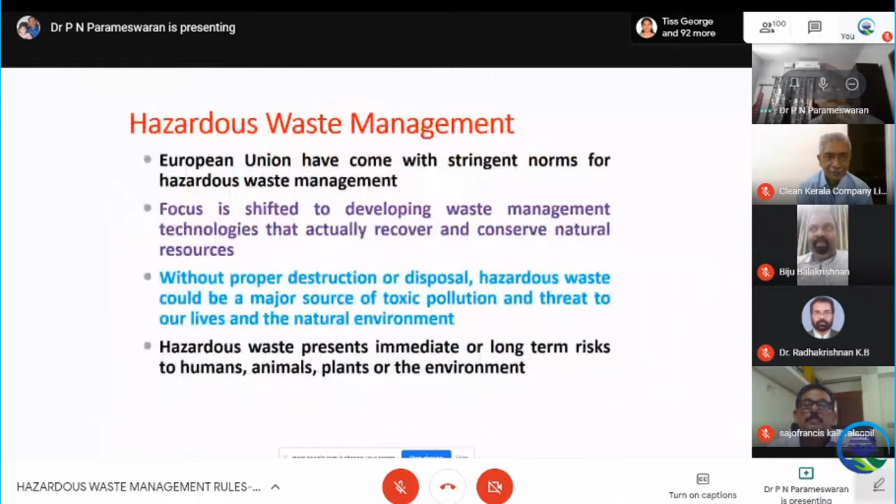Regarding hazardous waste management, which all of our previous speakers have talked about, the European Union has come up with stringent norms for hazardous waste management. Focus is shifted to developing waste management technologies that actually recover and conserve natural resources - that is the main focus. Recover, and dispose only minimum quantity. At the same time, without proper destruction or disposal, hazardous waste could be a major source of toxic pollution and a threat to our lives and the natural environment.

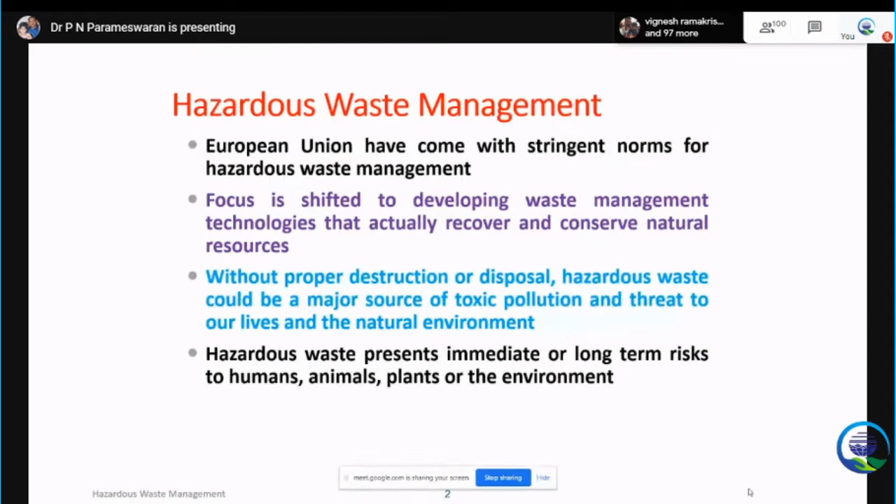This is what has happened at many sites in Europe or even USA - a large number of Superfund sites, contaminated with mainly hazardous chemicals, hazardous waste dumped illegally. A lot of funds are spent cleaning up and remediating these sites. We don't have that kind of money. We have started industrialization in the last 15 years, so we have not polluted much of our soil and land, but we need to take care. Hazardous waste presents immediate or long-term risk to humans, animals, plants, or the environment.

On the regulations, I think previous speakers have touched on this, so I will not go much into details. The Umbrella Act on Environmental Protection, 1986 - all provisions, rules, regulations today are under the Environmental Protection Act 1986, which came after the Bhopal tragedy. Initially in 1989, the Handling Act was there, amended in 2000, 2003. Then a new rule came in 2008, superseding the earlier rule - totally changed.

Similarly, in 2016, the 2008 rules were superseded and a new rule came, called the Hazardous and Other Waste Management and Transboundary Movement Rules 2016, notified on 4th April 2016. Even though notified in 2016, most states are still in the process of implementing the new rules - some are still following 2008 because the transition is taking place. Some of the authorizations given earlier are continuing as the change happens.

So what happened between 1989 and 2016? In the 1989 rules, there were only 18 categories of waste given in the schedule with regulatory quantities. For example, category 1 was cyanide waste - if the cyanide waste generated by an industry was more than 5 kg per year, then you had to get an authorization or permission from the Pollution Control Board.

Similarly, there are 18 categories which are given more as in general. For example, if phenol content in a waste is more than 5 kg, it is a hazardous waste. Like that it was given.

Subsequently, because of the Basel Convention and the people attending the meeting, the 89 rules were amended in 2000 and 2003 with major amendments, changing the definitions and schedules. There were process steps for processes generating hazardous waste, and based on characteristics in Schedule 2, it was added.

But it was found that in 1989, there was not much focus on setting up treatment, storage and disposal facilities. Nothing was available, for example if you had to send waste to landfill, there was no such facility existing. So it had to be created, but by 2000-2003 a lot of facilities came up, and accordingly the rules were modified. The 2008 rules mark a significant change from the earlier ones.

In Schedule 1, which is the listed waste, based on the process, wastes are listed. There are 36 manufacturing processes, each with 4 or 5 streams, giving 111 waste streams listed in Schedule 1. These 111 waste streams are, without question, hazardous waste. So if they are generated from that particular industry, they are categorized as hazardous waste.

Additionally, under Schedule 2, waste has to be considered based on concentration limits, that is characteristics. Based on the characteristics, it is defined.

In the 2016 rules, under Schedule 1, there are 38 processes. Earlier it was 36, so more processes were added, and the total listed waste streams are 125. So compared to 2008, 14 more waste types have been added into the present rule.

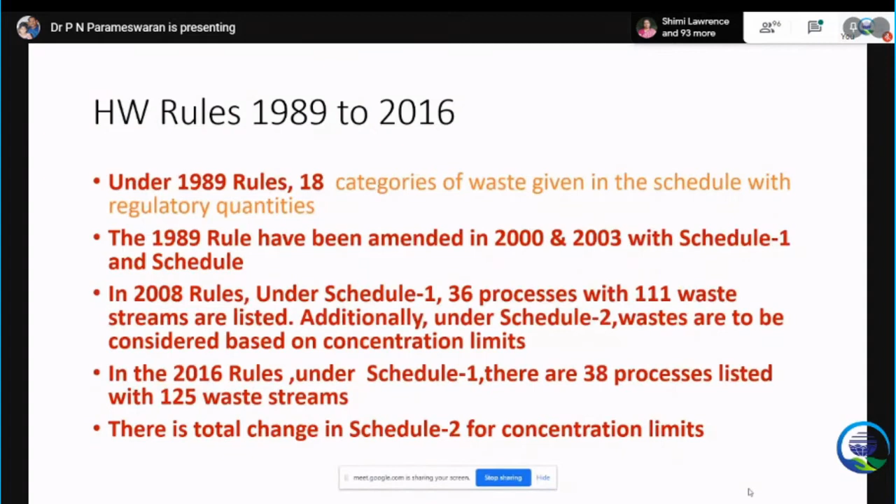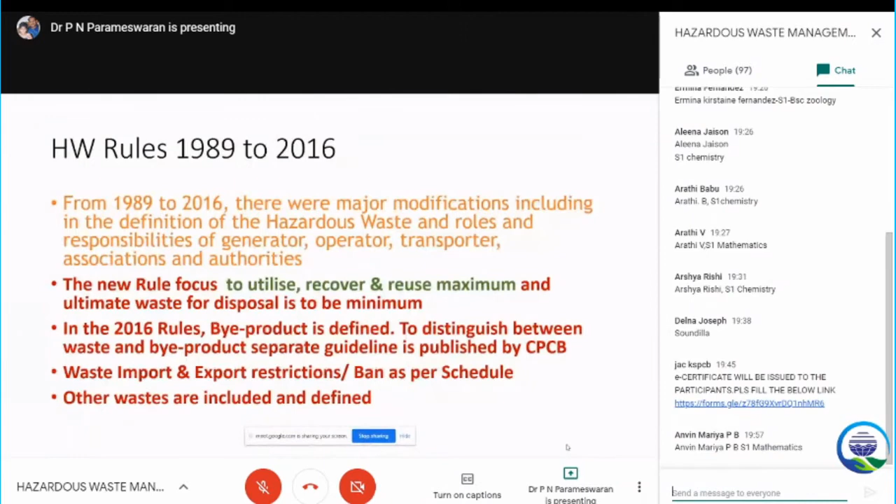What happened from 1989 to 2016 is that there were major modifications, including in the definition of hazardous waste and the roles and responsibilities of generator, operator, transporter, associations and authorities. Their roles and responsibilities have been changed.

A lot of things, for example identification of site, the roles there were changed. So responsibilities have been changed. Now things have been clearly

defined. The new rule focuses on utilizing, recovering and reusing maximum material, asking to conserve resources. So recover, reuse, co-process maximum material, and the ultimate waste for disposal is to be minimum. That is the fundamental point when you look at this rule.

In the 2016 rules, byproduct is defined. Byproduct was not defined earlier in other rules, so this is very important. To distinguish between waste and byproduct, a separate guideline was published by CPCB last year. I was also there in the committee discussions. This explains how you can segregate a byproduct and how permission can be given for its utilization.

There is confusion because some industries claim everything as a byproduct, but byproducts are really generated during manufacturing. For example, HCl can be a byproduct, but HCl can also be spent HCl. So that is clearly separated, and byproducts can be sold or utilized.

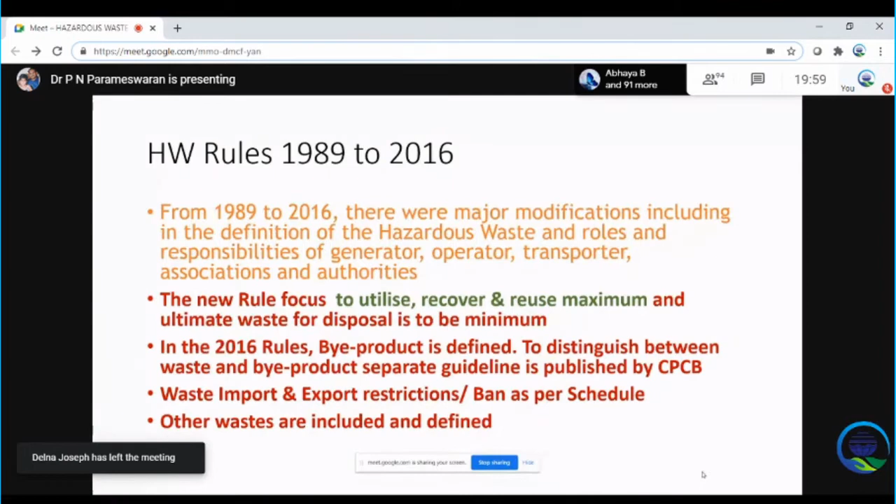Another important thing is that 'other wastes' are included and defined. This is basically for import and export, 'other waste' — it is not under the definition I am giving.

So the basis of these rules was the Basel Convention. I will not go much into detail.

One of the incidents which led to the creation of the Basel Convention was the Khian Sea waste disposal incident, in which a ship carrying incinerator ash from the city of Philadelphia in the US dumped half of its load on a beach in Haiti before being forced away. It was asked to go away — they were dumping on a beach.

It sailed for many months, changing its name several times. Unable to unload the cargo in any port, the crew was believed to have dumped much of it at sea. So it's a very big incident. There are several such incidents, but this is one of them - people disposing hazardous waste illegally somewhere, any underdeveloped country or developing country, or in the sea.

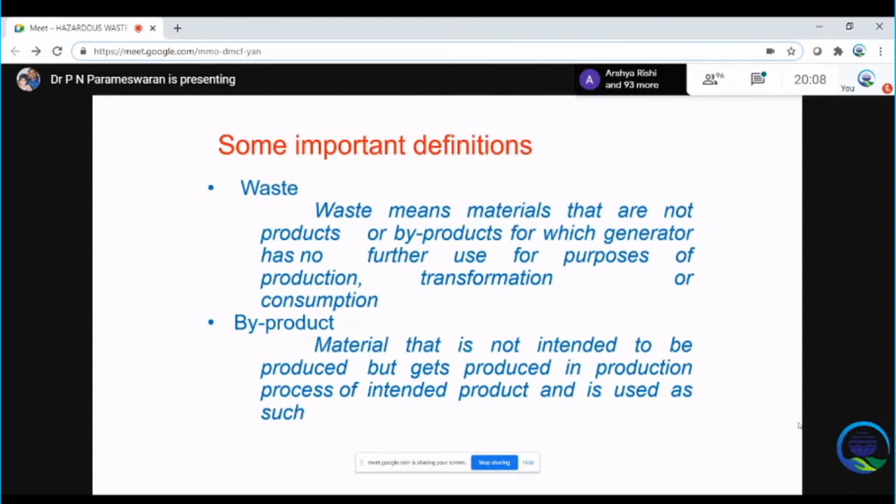Waste definition means materials that are not products or byproducts for which the generator has no further use. That is very important. Byproduct, as I told you, is material that is not intended to be produced but gets produced in the production process of an intended product, and is used as such.

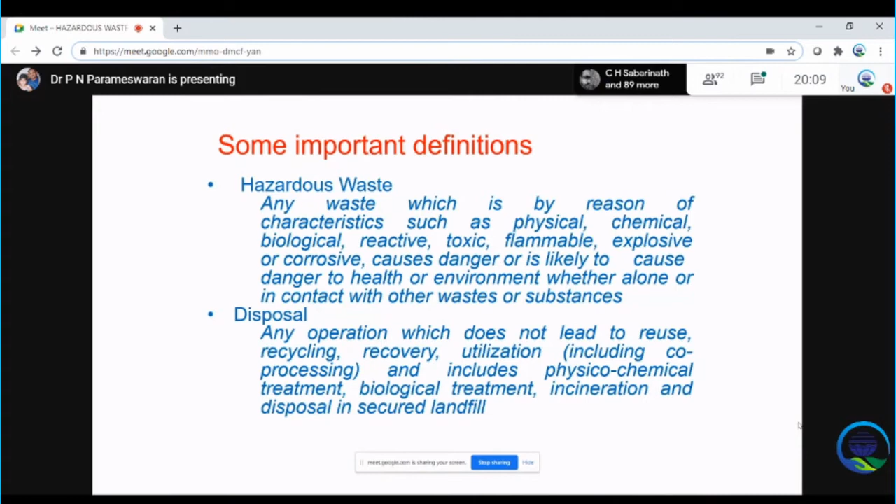Hazardous waste characteristics are reactivity, toxicity, flammability, explosivity, and corrosivity. This is the fundamental definition in the Basel Convention also. Disposal - what is disposal? Any operation which does not lead to reuse, recycling, recovery, or utilization, including co-processing. It includes treatment - physicochemical treatment, biological treatment, incineration, and disposal in secured landfill. So they have defined it very clearly. All recovery operations are exempted from this.

Co-processing happens in the cement kiln - use of waste material in the manufacturing process, where it can be used as an alternate fuel. It's very much practiced in many places. In India, almost 1 lakh ton of waste, or even more, is now used in co-processing.

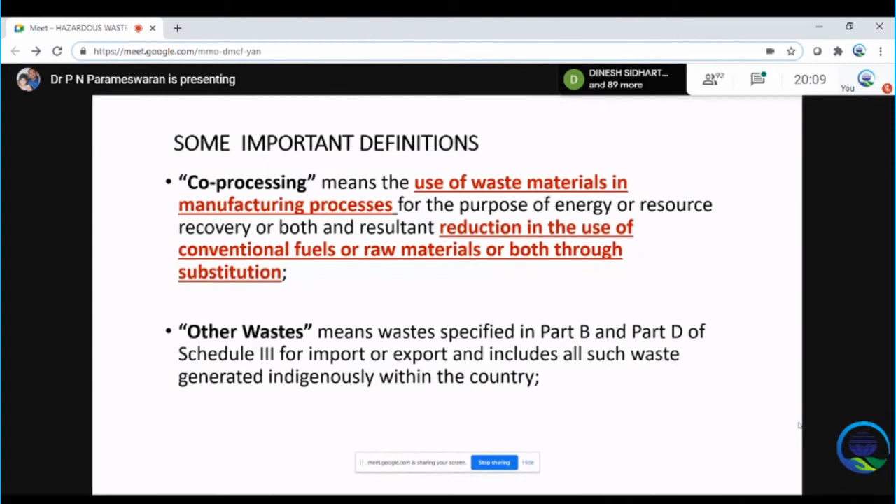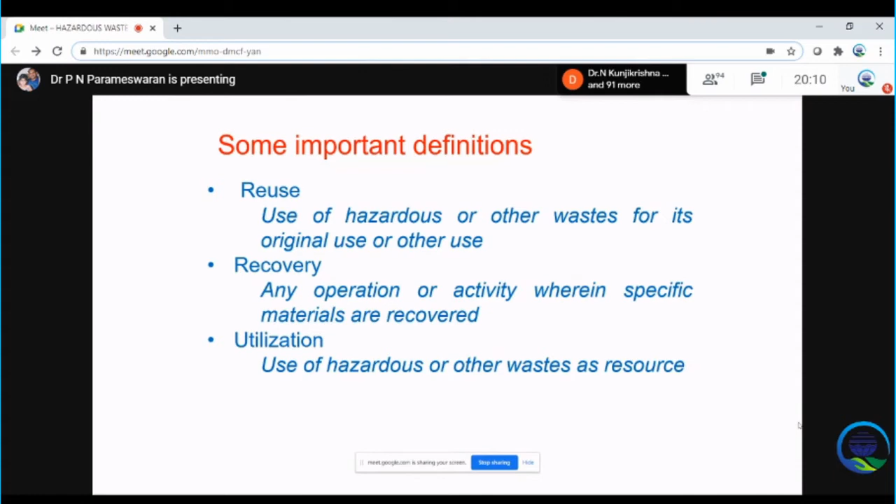Other waste, as I told you, is for import or export. Pre-processing treatment is a treatment before doing co-processing or recycling. Recycling is the reclamation, reuse, or use of hazardous or other waste for its original use or other use. Recovery is any operation or activity wherein specific materials are recovered. Utilization is the use of hazardous or other waste as a resource. So that is very clear.

Used oil can be processed and reused, suitable for processing, whereas waste oil cannot be used. It may include spills of crude oil, emulsions, tank bottom sludge, and slop oil. So this is a separate category. Used oil may have to be treated through incineration or other processes.

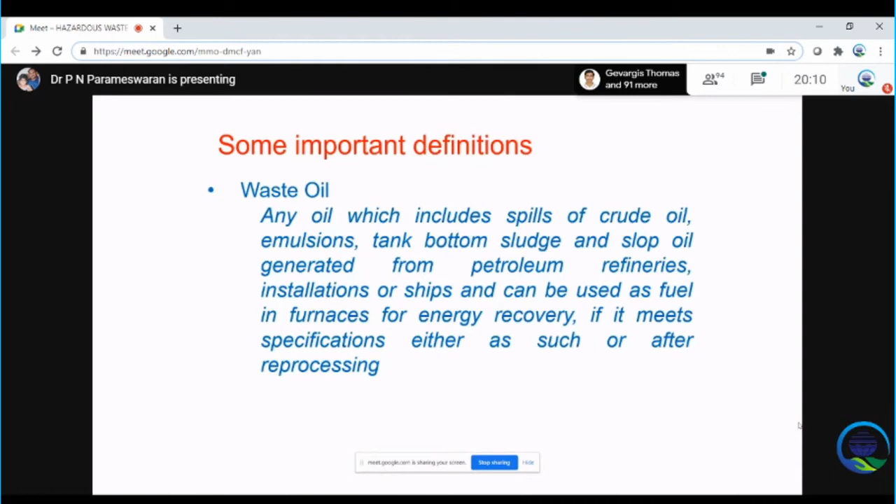So schedule 1, as I told you, includes 38 processes with 125 waste streams. Many processes have added spent solvent, spent catalyst, and spent acids, which weren't there much in the earlier 2008 rules. I saw this in some pesticide categories - spent solvent, spent catalyst, and spent acids are added in some things which was not there in 2008.

So what is schedule 2? I told you there is a change in the entire schedule 2. Constituents have to be determined as per the toxicity characteristic leaching procedure, TCLP. I think there is a slide on TCLP.

Few examples: arsenic if it is there more than 5 concentration in milligram per liter. You're seeing it given in milligram per kg elsewhere, but here when you do the leachate test, you have to find the concentration in milligram per liter - that is the TCLP test. Various compounds are given: for example, cyanide if the concentration is more than 20 milligram per liter, benzene if it is more than 0.5 milligram per liter. So you make the leachate, and in the leachate you do the testing.

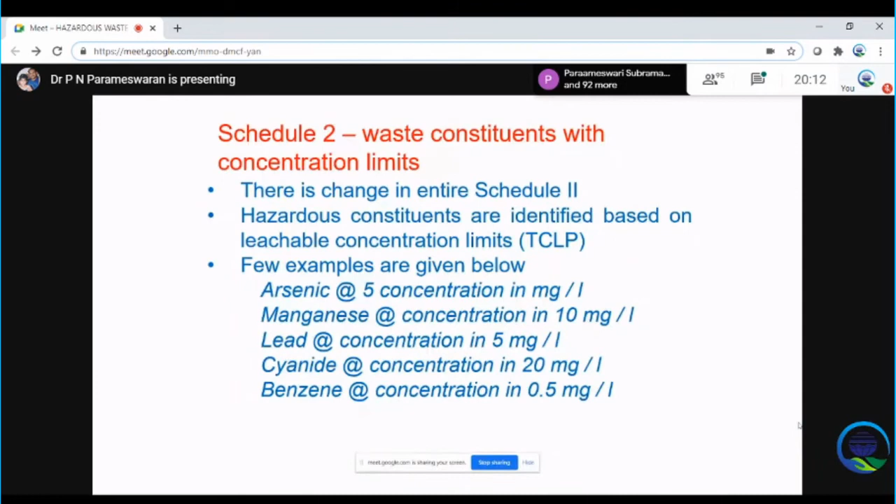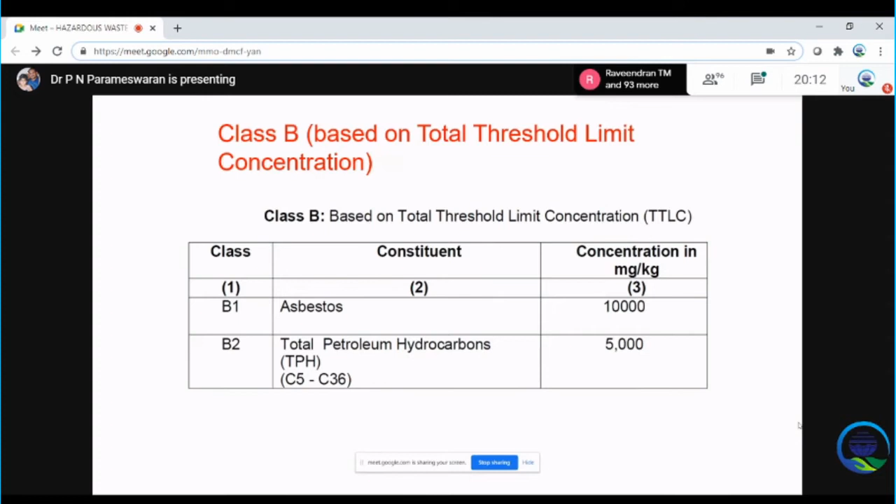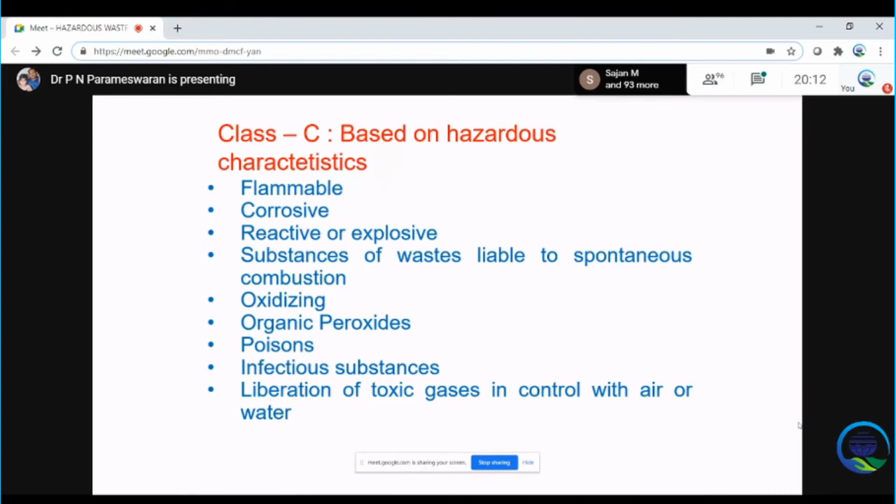If it exceeds the limit, then it is hazardous waste - a characteristic waste. That is the fundamental difference between the earlier rule and this one. Class B is given based on concentration - for example, asbestos at 10,000 milligram per kg. Similarly total petroleum hydrocarbons - even contaminated soil can be classified as hazardous waste easily by this classification. Then class C is based on hazardous characteristics like flammability, corrosivity, reactivity - all these criteria are there.

These are the classification characteristics used worldwide for classifying hazardous waste. Ignitability - if it is burnable; corrosivity - because acidic or highly alkaline substances will corrode; reactivity - if substances mix together they are reactive, many are reactive, peroxides and many other things are very reactive; and toxicity is one of the important things, very harmful to human beings. So hazardous waste categorization is basically accepted worldwide.

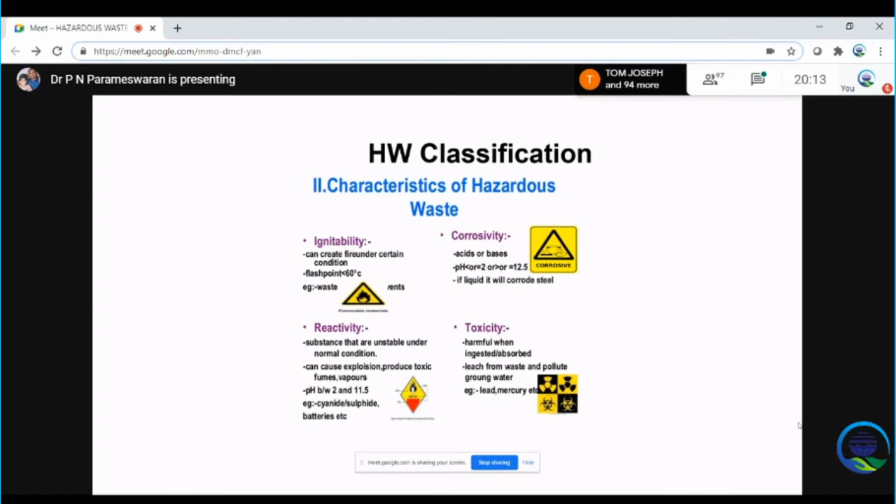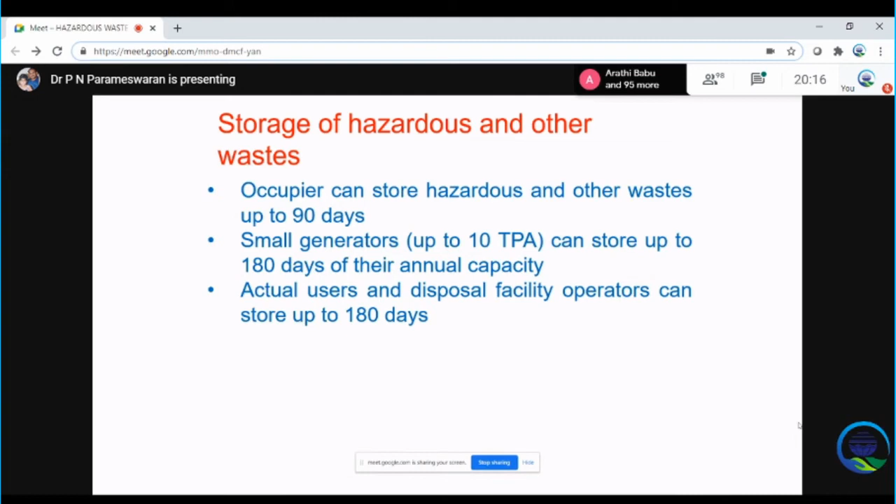Storage of waste - normally you can store for 90 days. Small generators are permitted to store up to 180 days. In special cases where you can recover, then up to 180 days may be permitted. There is a provision in rule number 9 under this.

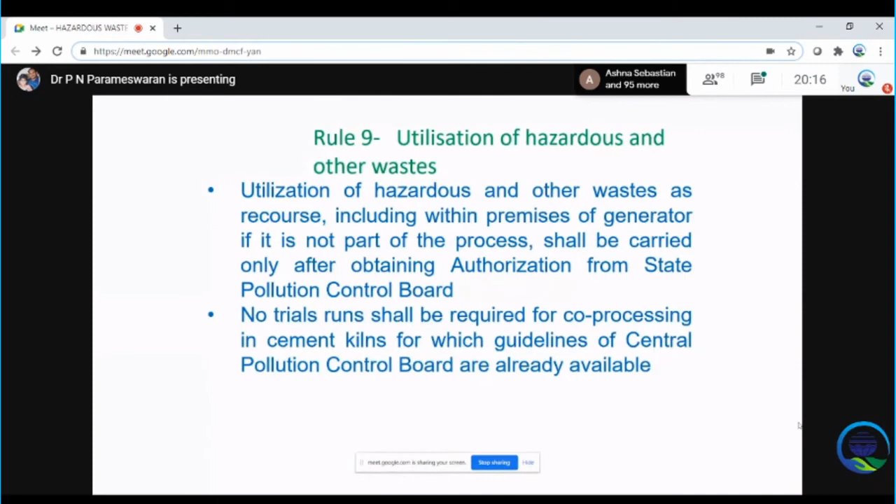For utilization, you have to get the permission. You have to get authorization from the State Pollution Control Board, and for that there are standard operating procedures prepared by the Central Pollution Control Board, and depending on that, people can apply and get this.

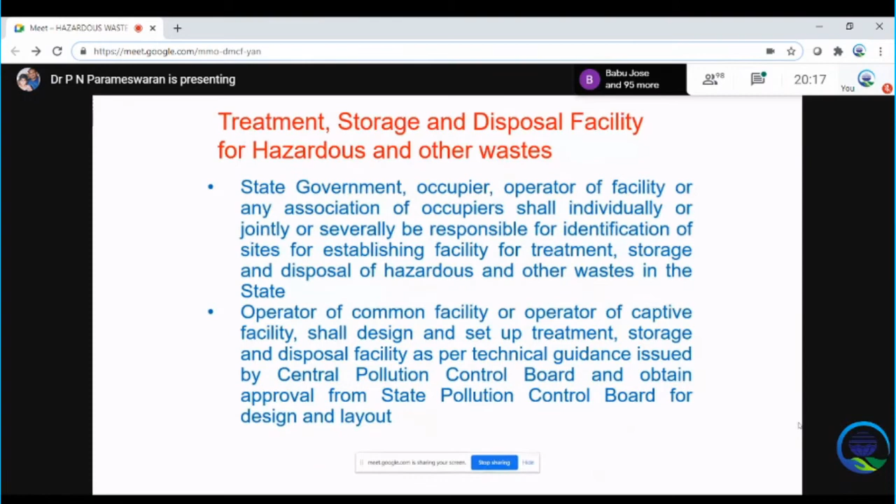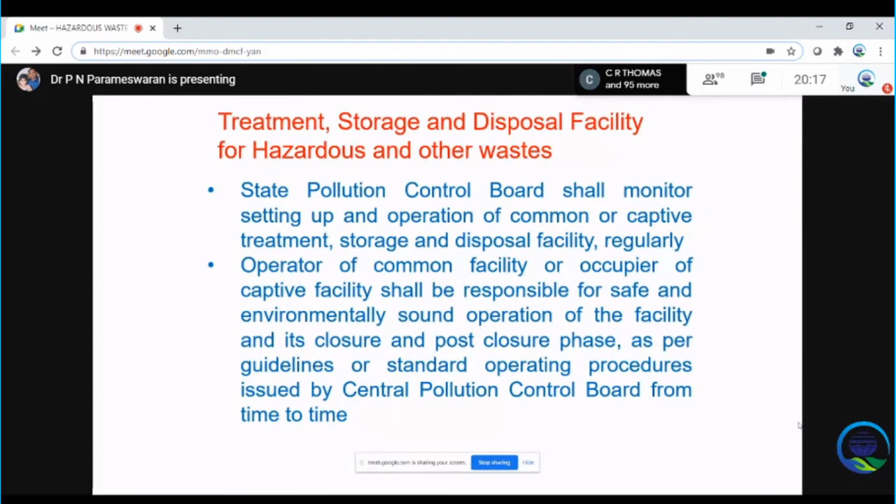Treatment, storage and disposal facility responsibilities are there: properly maintaining, design, setting up, operating, getting authorization, transporting the waste properly. All these are responsibilities of a common facility or even a captive facility. If a person has their own landfill or their own incinerator, they have to follow it properly. So those are the responsibilities.

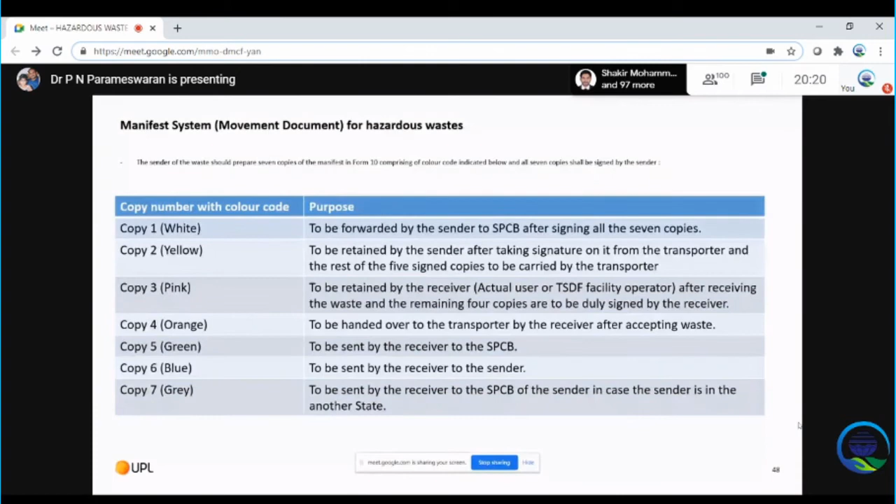Many states now use an online manifest system, like Maharashtra and Gujarat, so the data are clearly and easily visible. I think Kerala will also be coming online soon.

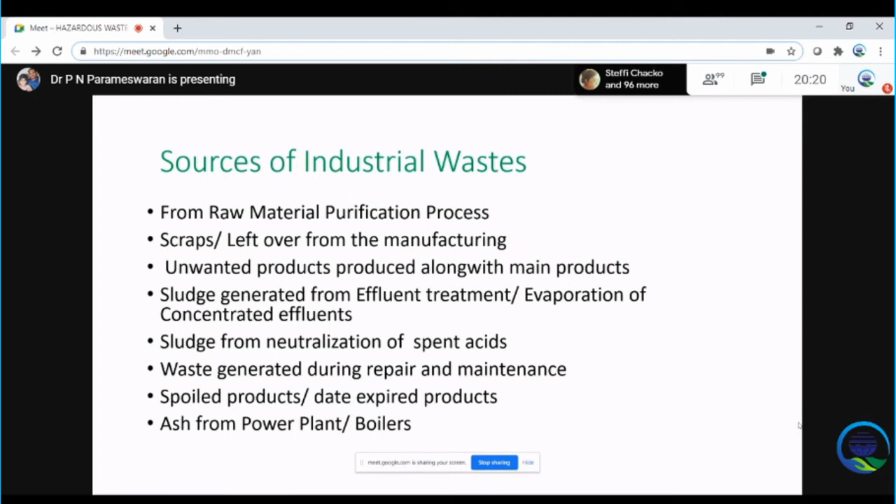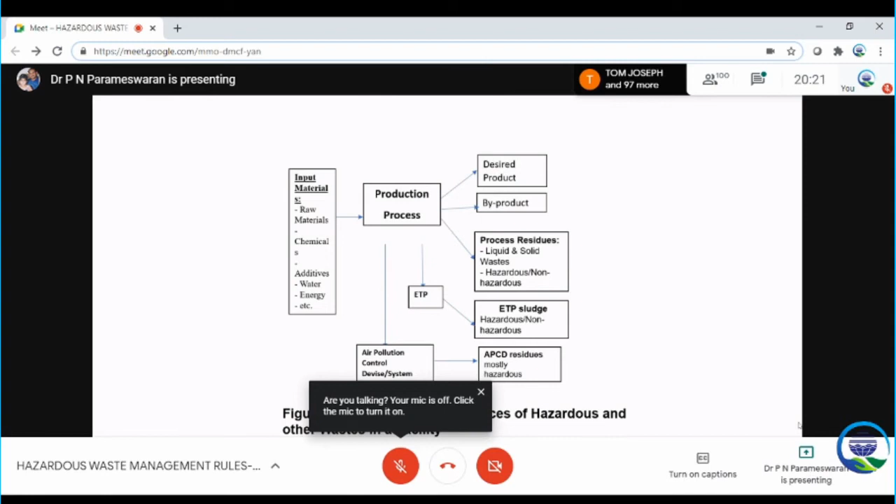Now, sources and the type of waste generated. I'll go very fast: in the raw material purification process, unwanted products, sludge generated from the effluent treatment plant, sludge from neutralization of spent acids, spoiled products, date expired products, spent catalyst, spent adsorbents, lot of materials. If you take raw materials and additives, process them, you end up with desired product, byproduct, residues. If you have effluent you treat it, you end up with ETP sludge. Air pollution control systems also generate some residues.

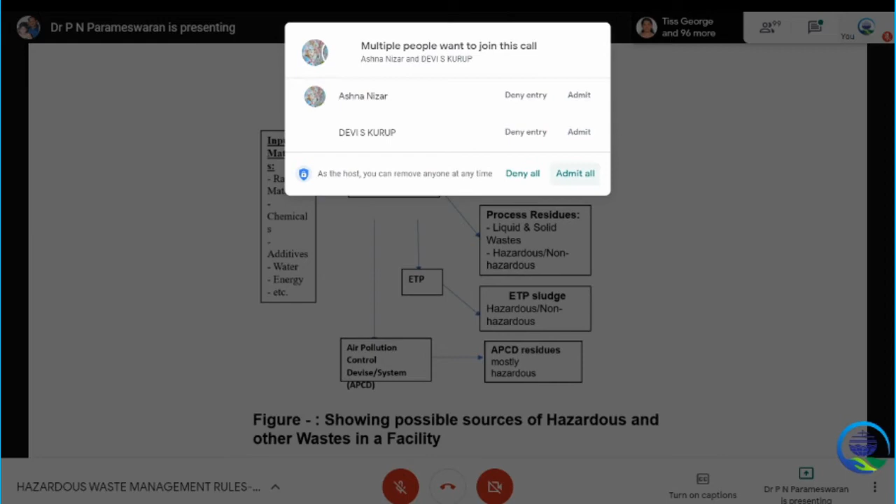So all of these you categorize into different types, and most of the things may come into the hazardous waste category. Types can be non-hazardous waste, hazardous waste, inorganic waste, organic waste, biodegradable waste, non-biodegradable waste. I'm not going into detail.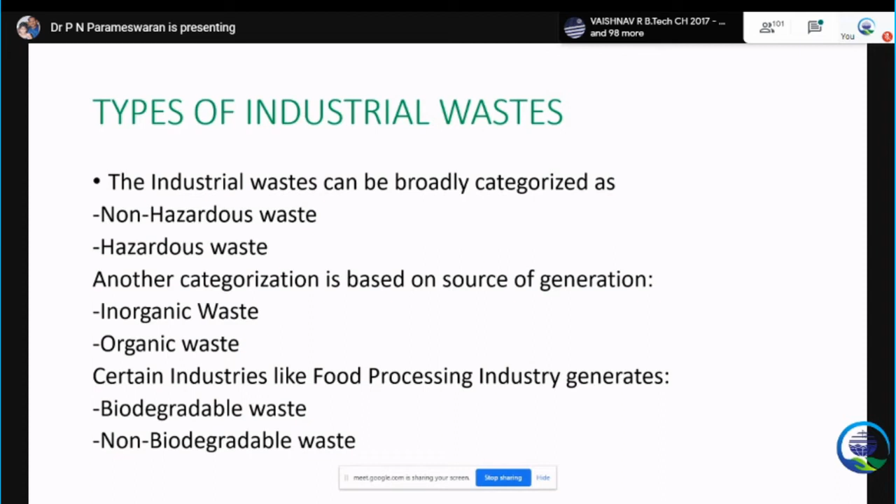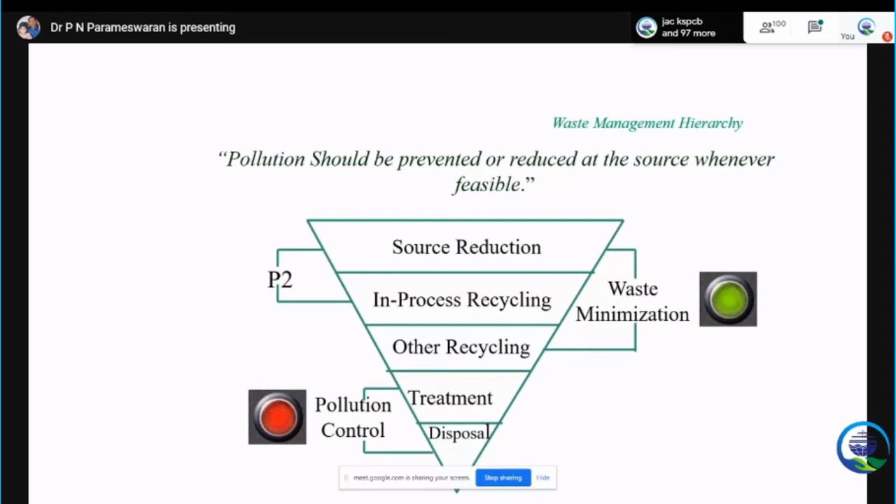This is the waste hierarchy again: source reduction, recycling, other recycling, treatment and disposal. You can see green and red. Treatment and disposal is considered the least preferred activity, but you have to do it. So waste characterization is very important.

I told you the TCLP test is one important thing. It's a USEPA methodology. Waste is mixed and leached with water at pH 3 to 5.5. Two types are there. It is mixed in equipment for 24 hours, then that leachate is taken out and analyzed. That procedure is called the TCLP test.

This mimics what happens naturally if acid rain falls and something may leach away. You have to test like that concept, and then they do the analysis.

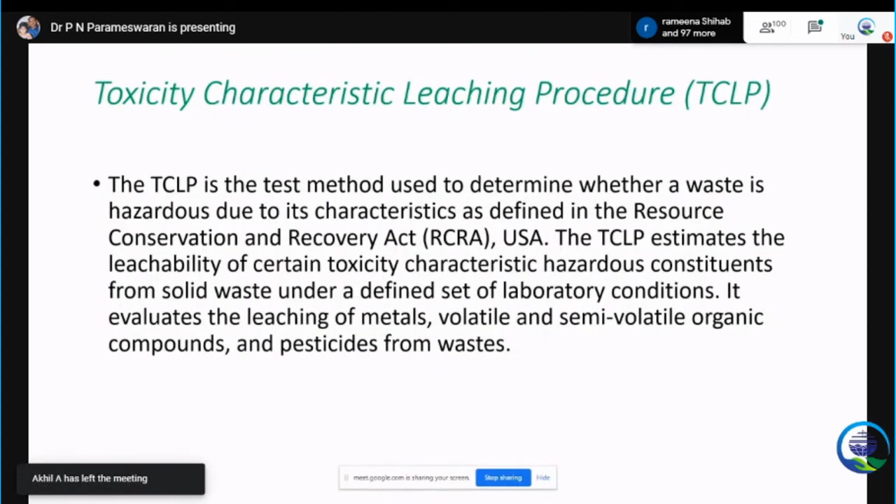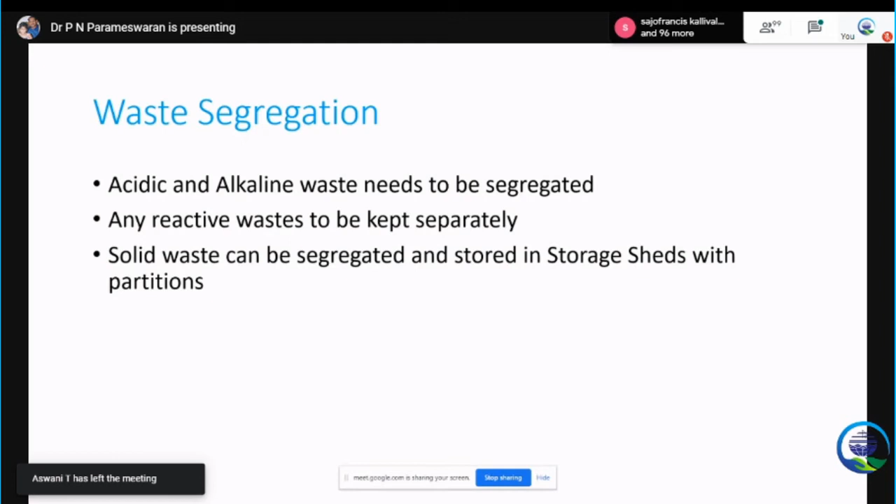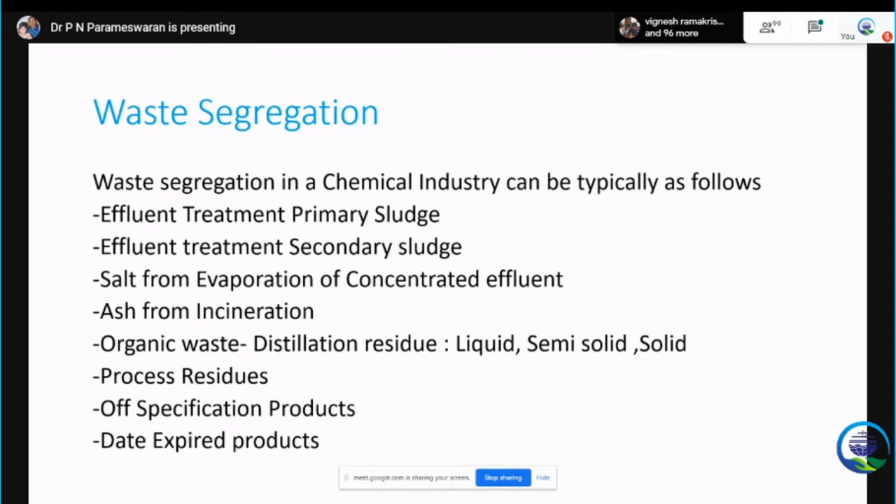Waste segregation is very important. You have to segregate the waste accordingly. Acid and alkaline waste needs to be segregated, any reactive waste to be kept separately. Various categories are there: effluent treatment plant sludge, primary sludge, secondary sludge, salt from evaporation, ash from incineration, organic waste, process residues, and spent solvents, spent catalysts, spent absorbents.

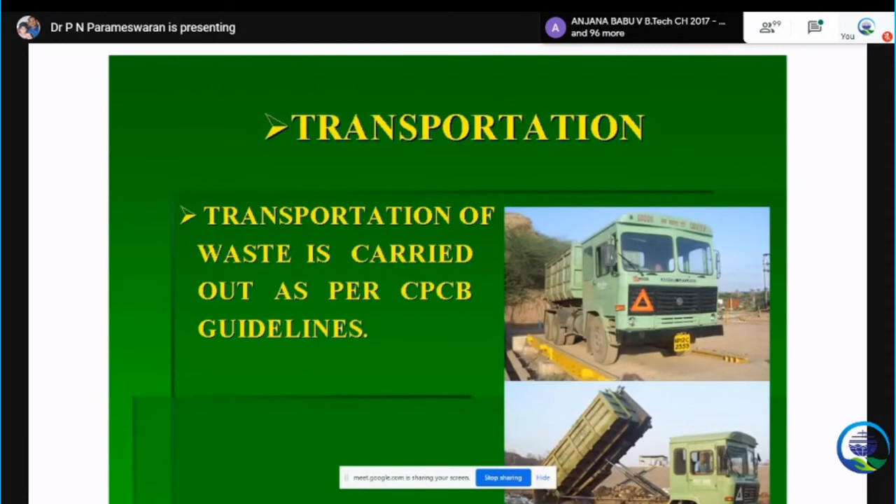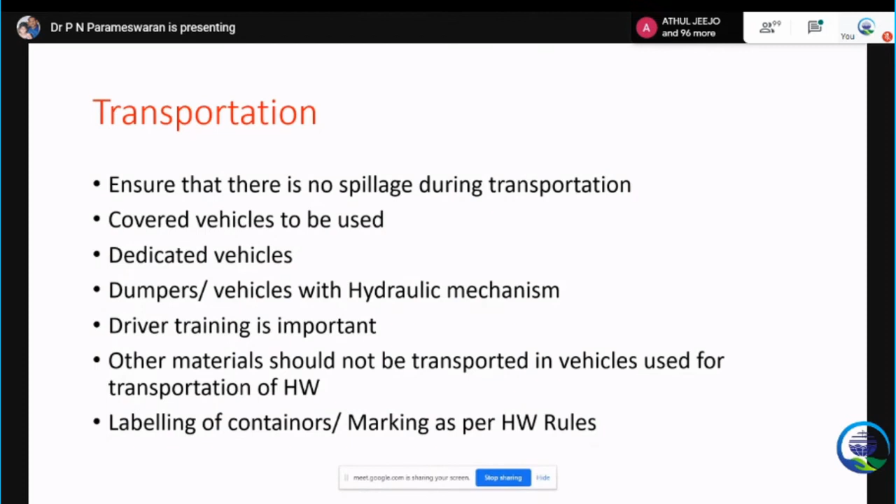For transportation, dedicated vehicles need great care, as our chief guest told us. It's very important that there should be no spillage. It should be a covered vehicle, dedicated vehicle, dumpers with hydraulic mechanism, and drivers should be given proper training. For storage, you need a proper storage facility with impervious flooring, spillage collection, roofing, and flame-proof fittings.

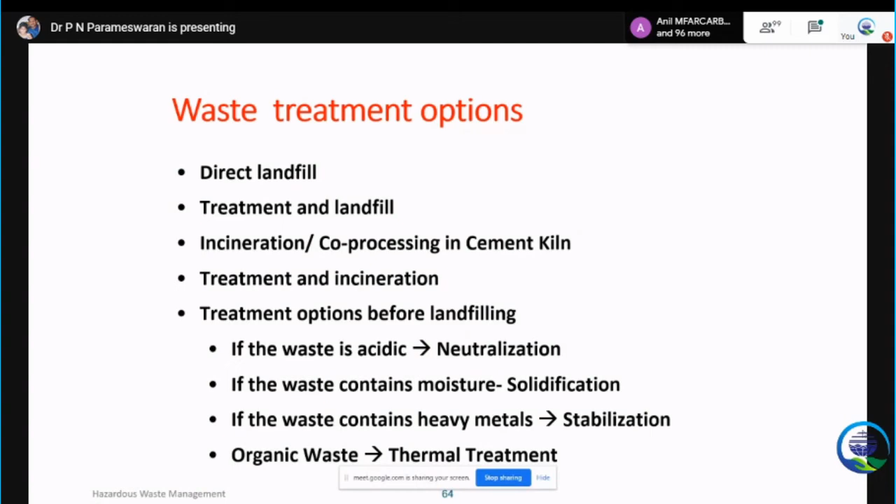Waste treatment can be direct landfill, treatment and landfill, or treatment and incineration. There are different treatments required: neutralization, solidification, stabilization, and thermal treatment. Because of time constraints I will skip details, but all of you know there is an acceptance criteria. Neutralization means pH is to be brought into the neutral range.

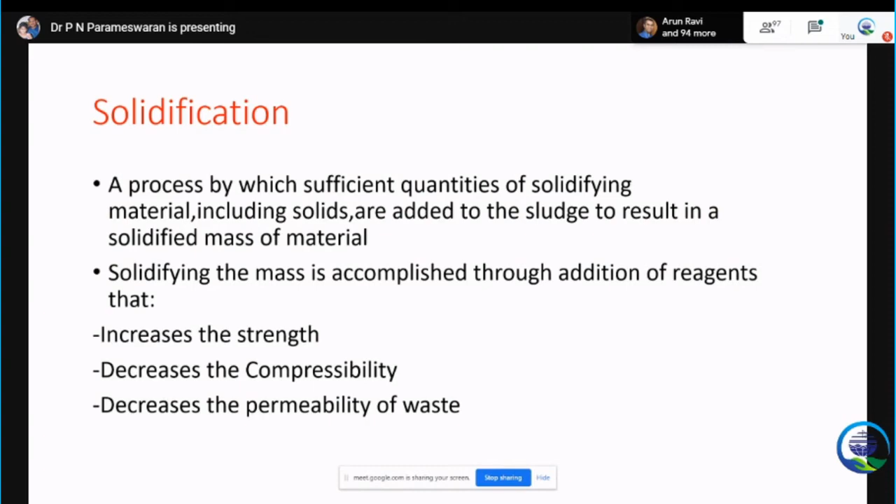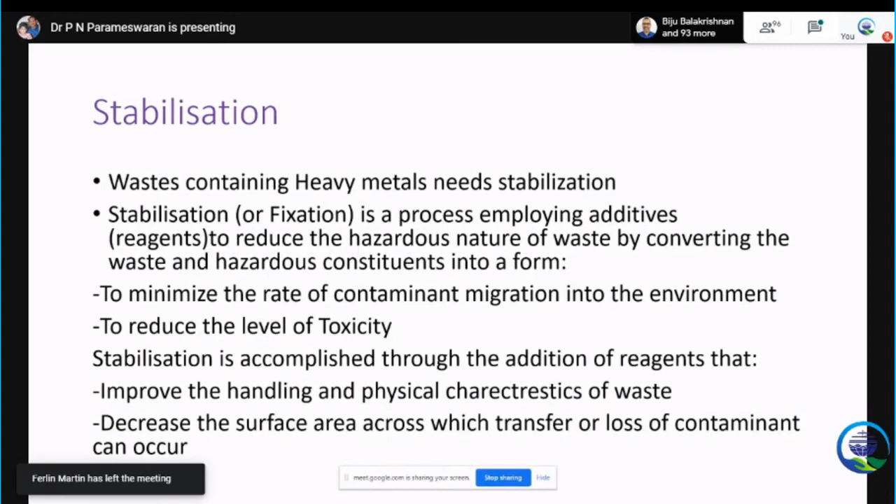Solidification is a process by which, because some waste may be slurry, you have to make it solidified. Stabilization is very important because if some heavy metals are present, you have to immobilize them - that is a fixation process. You mix it with certain materials like cement, bentonite, lime, and some other chemicals to fix it. Then you do the TCLP test again, so it will not leach out.

Thermal treatment is for organic waste, like incineration, or you can do co-processing. Chemical engineers and chemists know clearly that organic waste, when oxidized, gets converted into CO2, H2O and so on. There is a standard, and we have to go for 2-stage incineration to safely incinerate the waste.

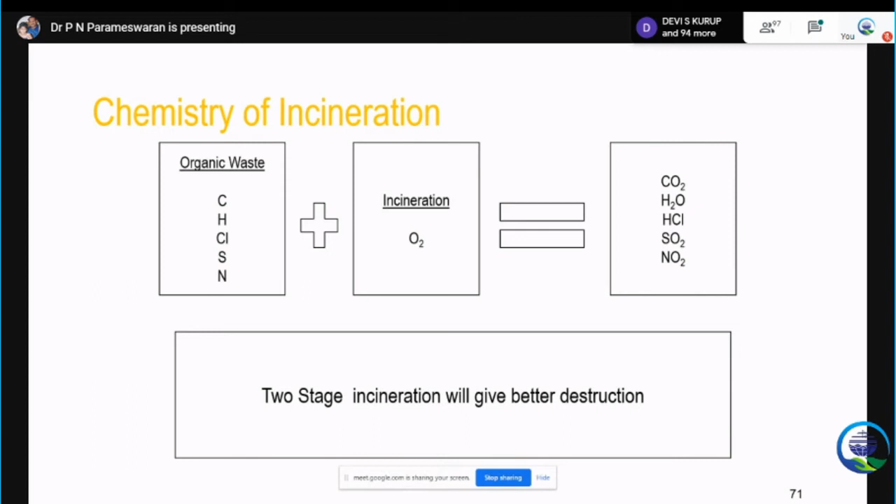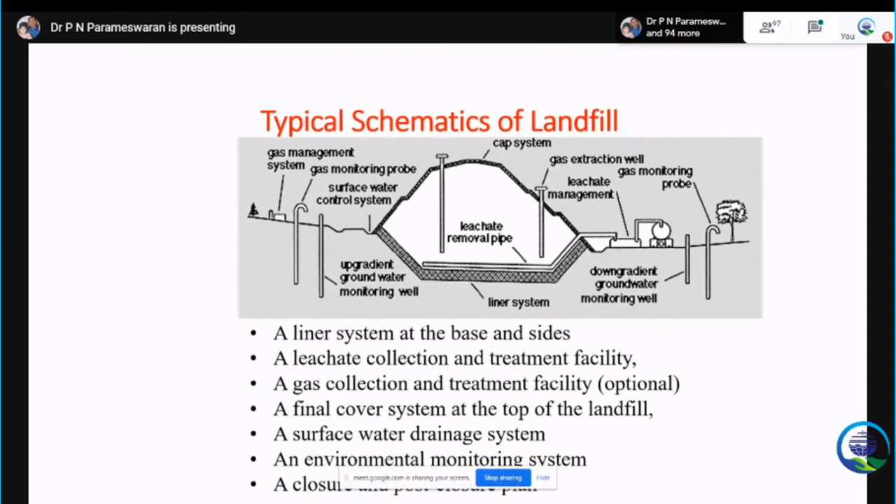Landfill is the ultimate disposal. You excavate, provide the lining, put material there, and then cover it again - it just becomes a tub, which you monitor. The main thing is that it should not contaminate the soil or groundwater, so there are monitoring wells and it should be properly designed. This is called a secured landfill.

These are the liner systems: clay liner and the lining geomembranes, as per CPCB standards. Two geomembrane linings are there, with a minimum 1.5 mm thick layer, and clay linings of minimum 450 mm, which act as natural linings.

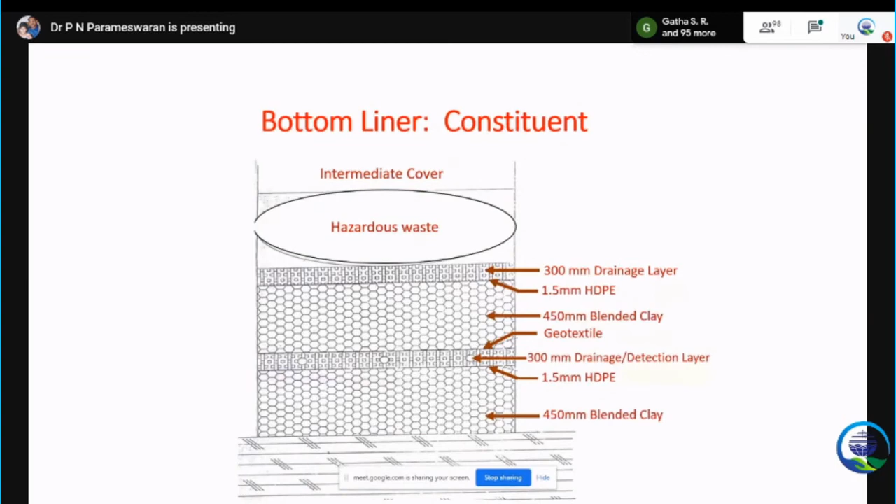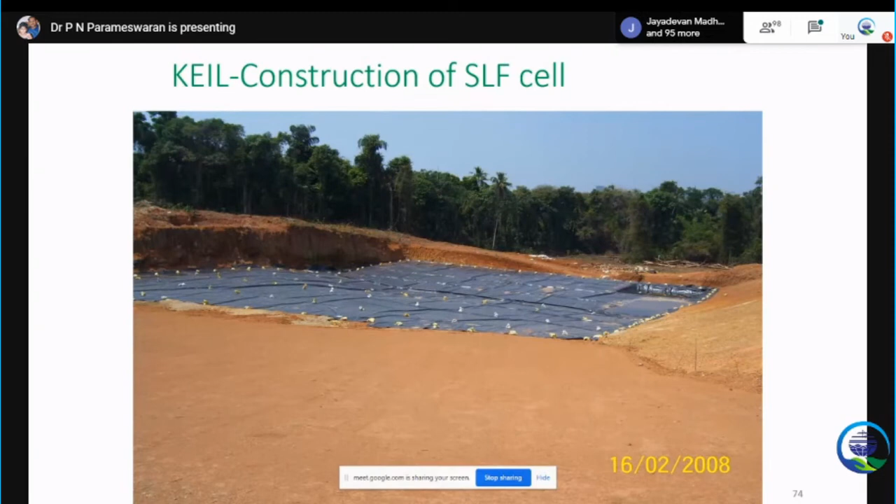Then you put the waste, and this is the typical landfill construction of the KEIL landfill. Some few photos so I can complete very fast. So this is providing the HDPE liner.

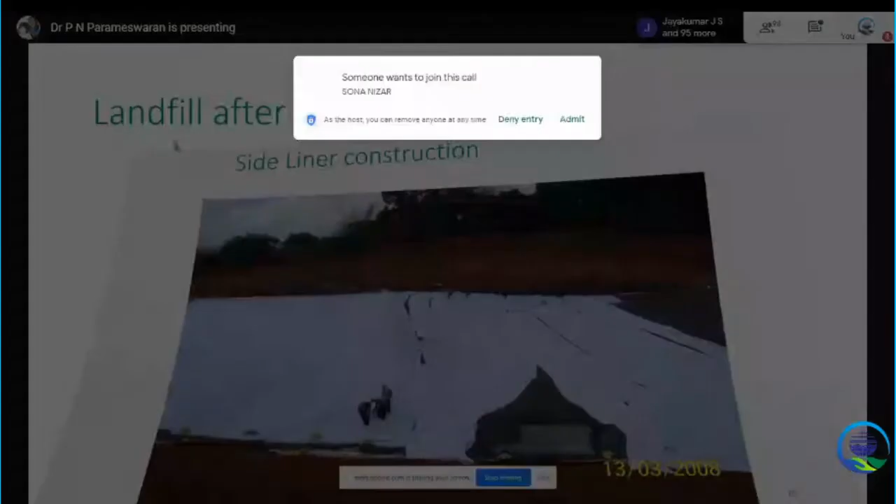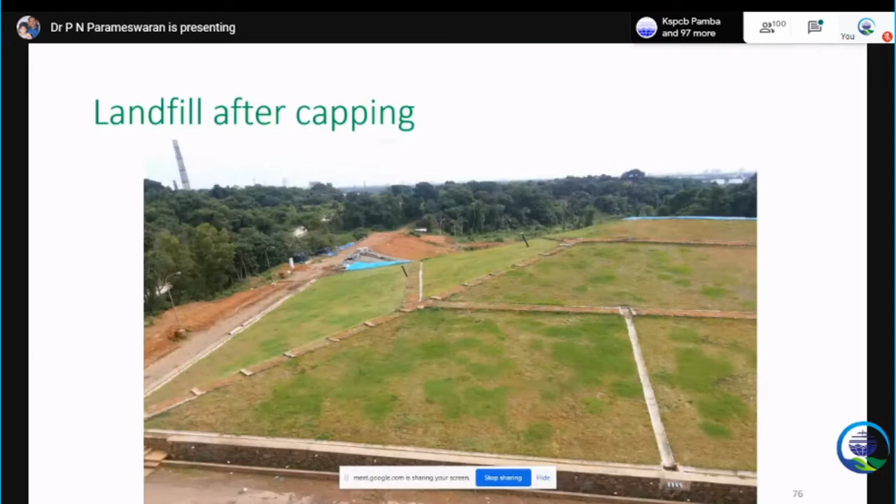Underneath there is waste and at the bottom there is a liner. The leachate, whatever water is generated, is pumped out and treated, and that is fully treated in a multiple effect evaporator.

This is designed by Dr. Manoj Datta, a professor from IIT Delhi, and all standards are maintained. He visits once or twice a year to see the construction activities. We maintain this and get a completion certificate after construction of every cell, because that is very, very important.

This hazardous waste received, in a year, maximum last year about 62,000 tons, and in 18-19 about 65,000 tons. So there is a cumulative quantity of about 5 lakh tons that has been received and disposed of in this facility.

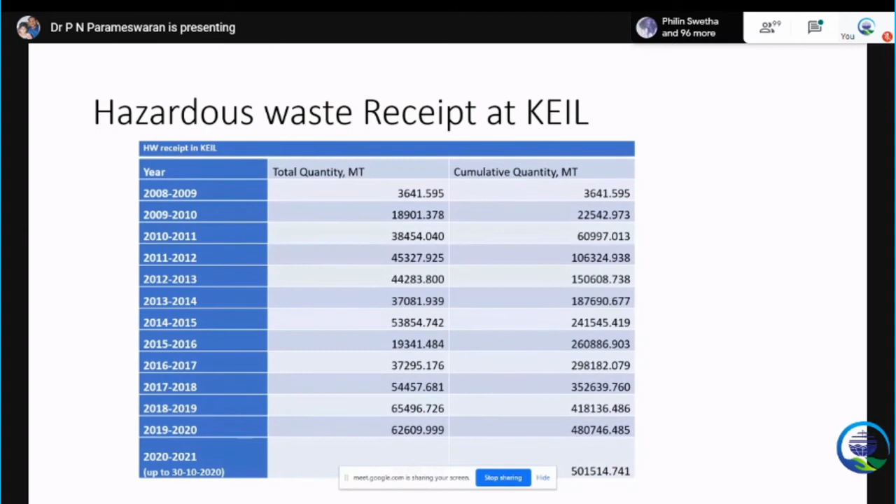Major suppliers are there: Hindalco, Cochin Shipyard, Nitta Gelatin, and all these industries, more than 1,500, and a good quantity is supplied by various industries. We are very thankful to the industries for supporting this, because this project has come up with our initiative. We were very afraid that we were not getting the waste properly, and the main generator like Cominco Binani is not working, as all of you know. So we have difficulty; we are not getting waste if it is not viable.